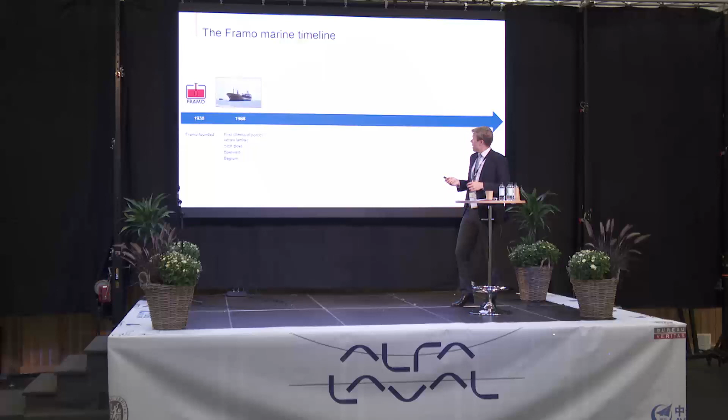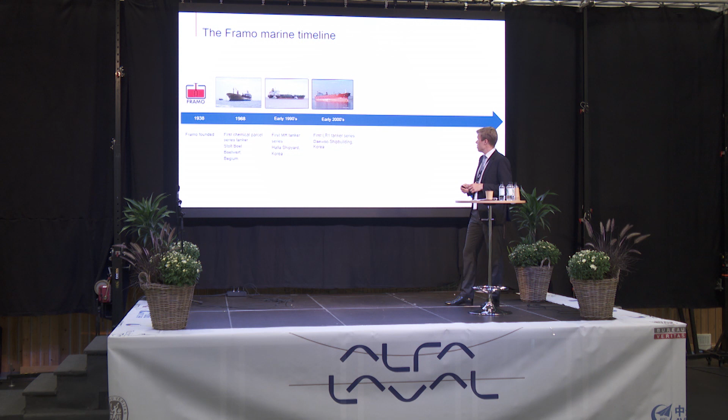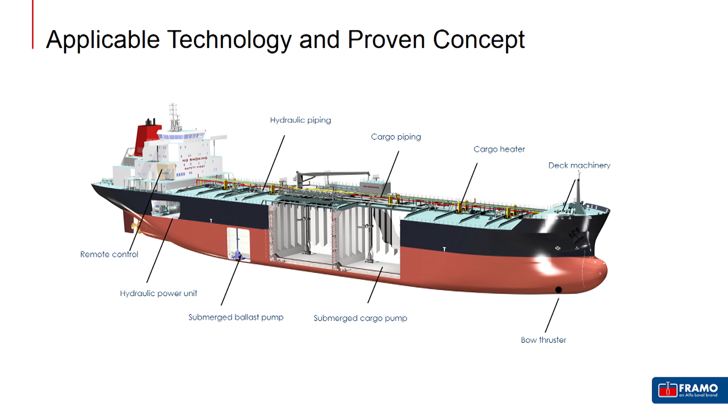But first, what is Framo? What is a Framo system? The main purpose of a Framo system is to optimize the cargo handling operation for the ship owner. And we look along 3 dimensions. The first is that you should spend less time on cargo operation, meaning quicker cargo unloading, efficient stripping, and less slop treatment. Secondly, the vessel must be able to load any type of cargo, giving you maximum flexibility. And thirdly, you need to be able to efficiently switch between different grades of cargoes, because one journey it may be a petroleum product, the next it may be an acid or something cooled or heated or viscous or whatever. So in sum, we are trying to provide an improved overall cargo handling performance, which actually means a quicker turnaround time, more ton miles with the cargo and fewer voyages in ballast.

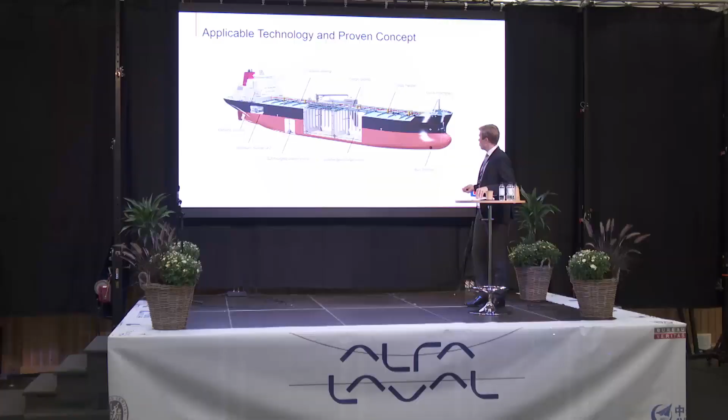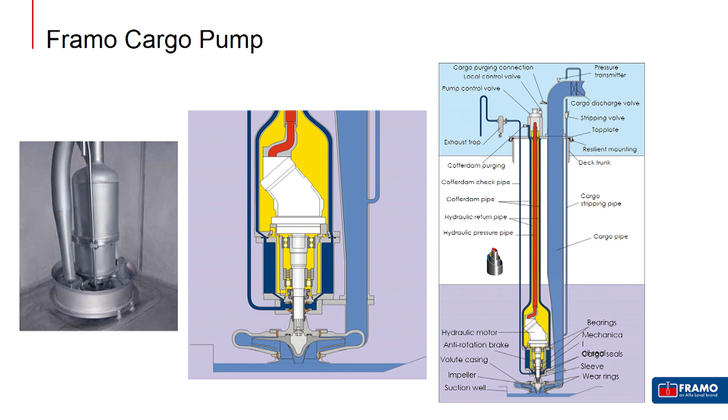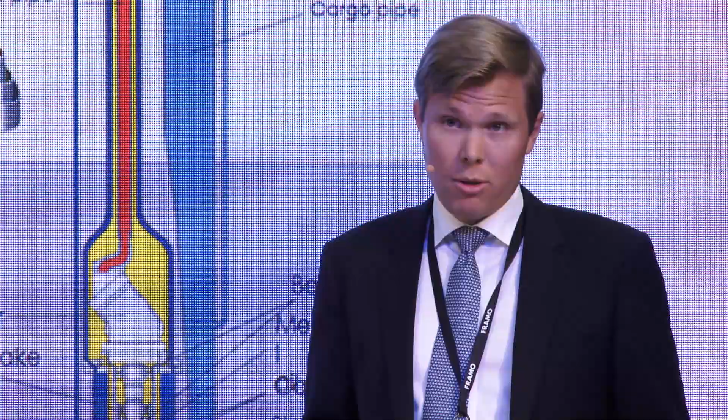Okay, and then we have the complete hydraulic system, but of course the heart of it all is the beautiful submerged hydraulic-driven cargo pump. It is based on a very robust construction with a short and rigid shaft. This design, with the combination of a short and rigid shaft and a hydraulic drive, allows you to pump any cargo there is, regardless of specific gravity or viscosity, and it is also made to withstand the tough impact from hours of tank cleaning afterwards. It has a built-in stripping system which empties the tank well within all IMO requirements. There are no loose items or moving parts inside the tank. The pump is completely surrounded by a cofferdam, ventilated to the atmosphere, protecting the cargo from the pump and vice versa.

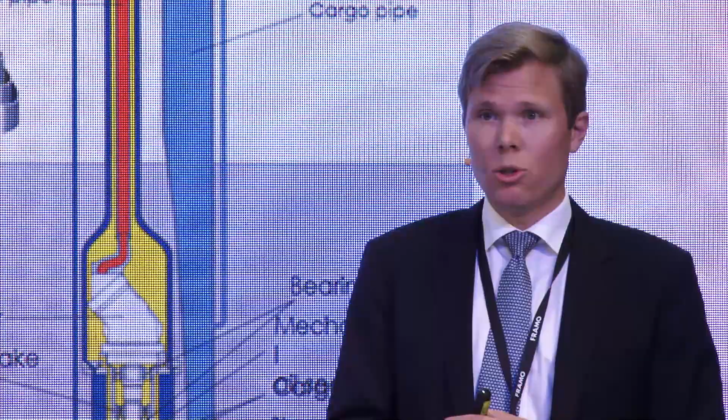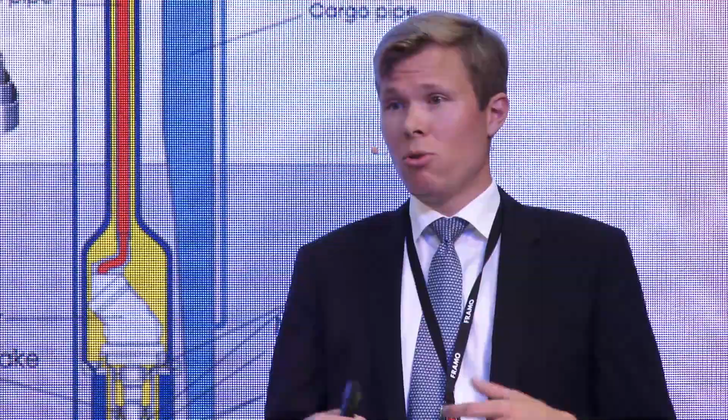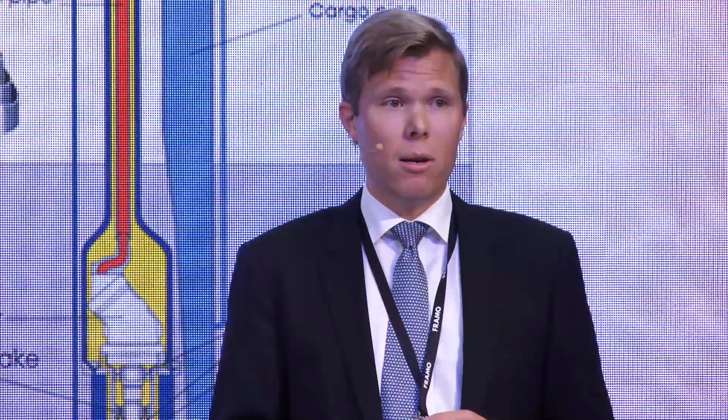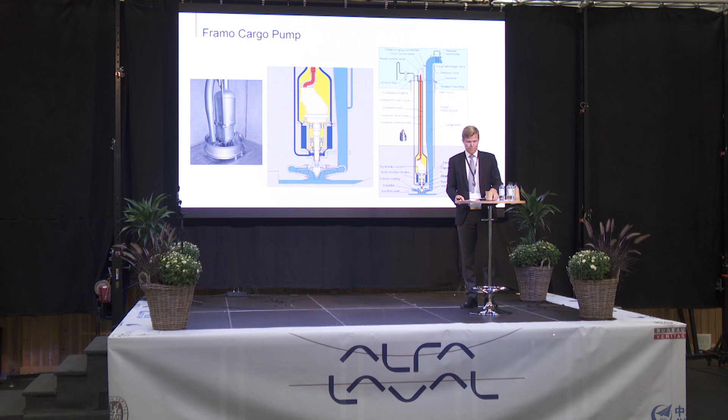And as you know, the complete system is based on a hydraulic power transmission, which has several benefits. At the pump side, you get the fail-safe design where the drive is also the cooling medium and the lubrication medium of the bearings and the motor, meaning if you lose cooling, you have effectively lost drive, so it's impossible to overheat the pump, for example. Additionally, you have a fully flexible system with 0 to 100% capacity control locally or remotely. And it's not possible to overspeed or overload the pump, as it will automatically adjust to any given discharge situation. Okay, that was a little bit about the Framo system. So if we look at the next generation LR2 product tankers with Framo, or an Aframax-sized tanker where you coat the cargo tanks, and having the basic principle with Framo in mind, we will see how this applies.

Of course, today, the majority of these vessels are sailing with a conventional pump room system. But we see a clear trend that the advantages with a submerged cargo pumping system is being increasingly recognized. Basically, the same concept which was first developed for the stainless steel parcel tankers and then the MRs and the LR1s are now also being refined for the LR2s. And the arguments for doing so is very much the same.

You get an improved vessel utilization, you increase your cargo volume by deleting the cargo pump room, you improve your fuel economics, you get a segregated system where you protect the value of your cargo, and you improve your safety and eco profile.

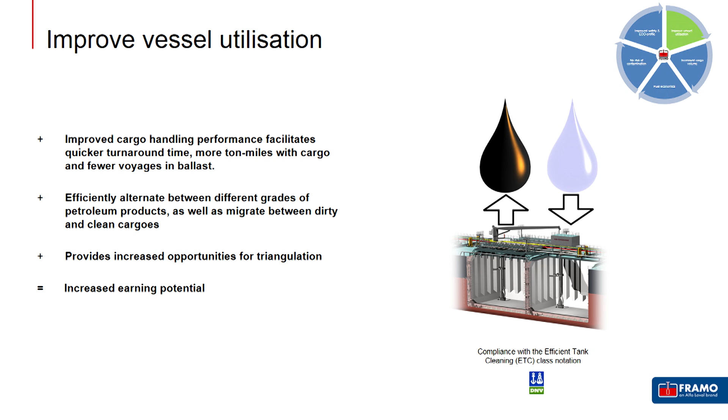So the improved vessel utilization, this is due to the fact that you get a more efficient pumping system. You can unload your vessel more quickly, you can strip down the tank more quickly, and you get less slop treatment. And the system allows you to load any type of cargo, as we discussed, and the ship will also be able to efficiently switch between different grades of cargo.

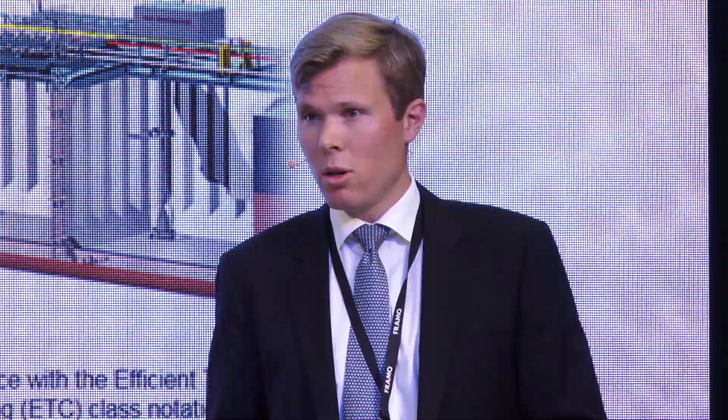And this will increase the vessel's ability to take on new types of cargo, and it will also be better positioned to play in the spot market if you are off charter or in between. So we strongly believe that you will have an increased earning potential if you switch from the pump room to the Framo system on this vessel.

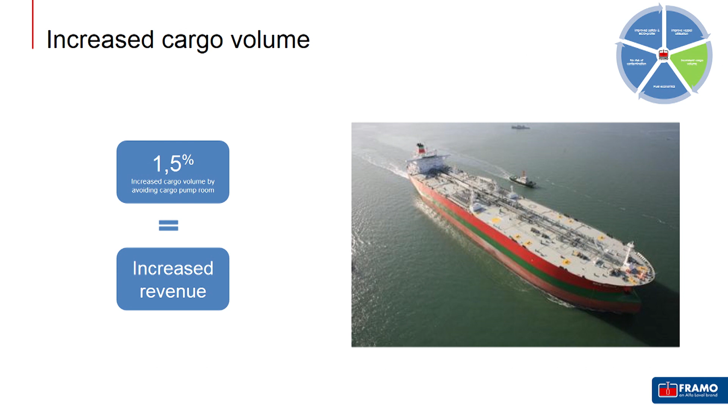Then something very tangible, by deleting the pump room, you increase your cargo volume by approximately 1.5%. For a tank of this size, you're talking about maybe 1,500 cubic. And with 10 to 15 discharges per year, you can carry maybe 20 to 25,000 additional tons of cargo each year. This has some value, which somebody other than me probably can decide better what is.

Then, of course, another very tangible fact is that every time you do the discharge operation, you will save 40 tons of heavy fuel or more. This is simply because the efficiency of the Framo system is superior to a conventional steam turbine-driven pump room. So again, if you do 10, 15 discharges per year, you are saving 400 to 600 tons of fuel per year. And if you look at the 5-year horizon, the investment profile to get the Framo system is starting to look very attractive.

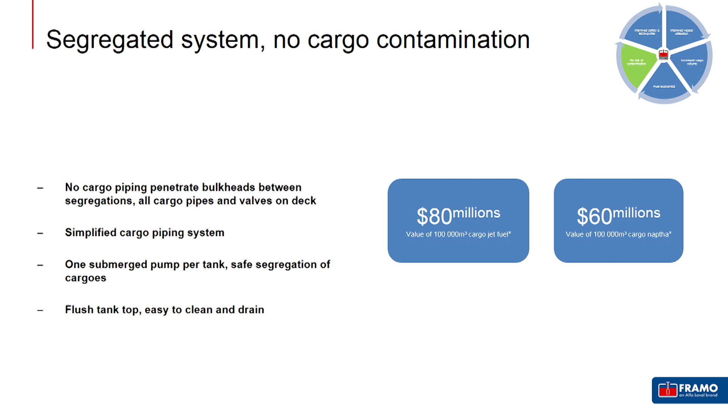Then you get a fully segregated system. By removing the pump room, you can also remove the long suction lines inside the tank, which is penetrating segregations. Also, actually for the shipyard, the construction period will be much easier. All the cargo piping and the valves arrangement will be 60% less.

Also, by removing all these spaghetti basically inside the tank, and maybe you've also at this point of time removed the coils because you will rather have a Framo deck-mounted cargo heater, you can get a very clean tank top with few cleaning shadows, so it's easy to wash down the tank and make the vessel ready to receive a new cargo.

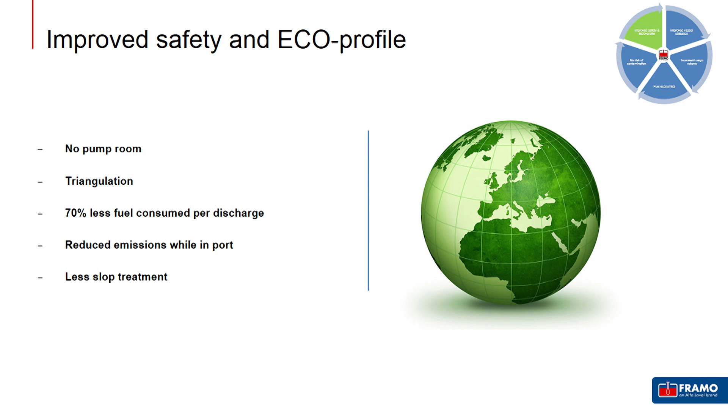Okay, improved safety, of course, removing pump room is a safety improvement. Also, you are using 40 tons less fuel in port every time you discharge. This is, of course, reduced emissions while in port. You get less slop treatment due to the simplified cargo handling system and improved stripping capabilities. And of course, the increased carrying capacity allows for more cargo transported per ton fuel consumed.

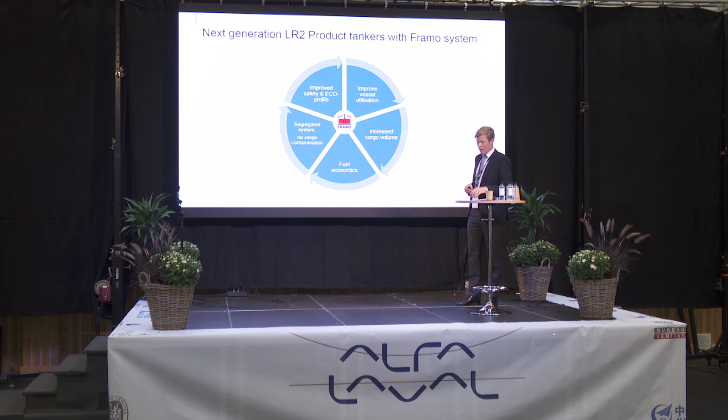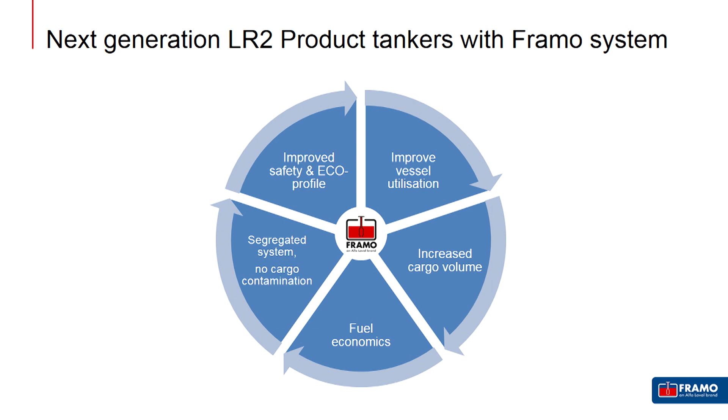Okay, so at least we believe in a future where LR2 tankers will be designed with submerged cargo pumping systems, where you have fully corrugated cargo tanks, you have 6 or 7 segregations, and it will look more and more like a large MR. And if you decide to coat your Aframax, you have an intention to go with products, and then it makes, in our view, very much sense to also put in Framo cargo pumps.